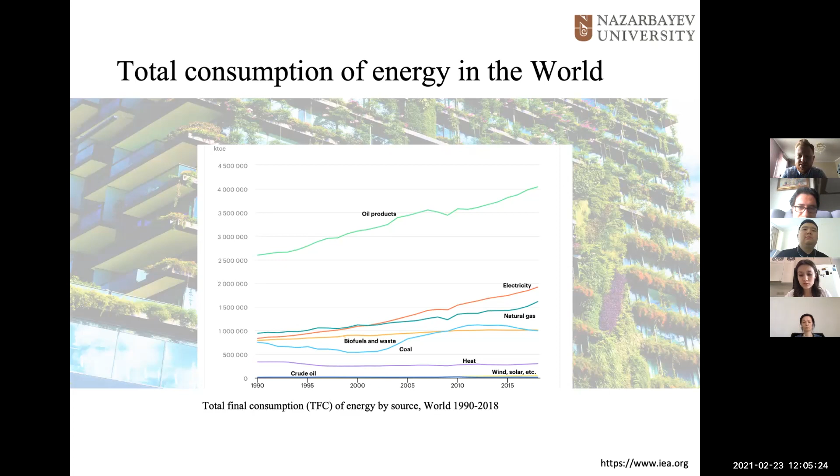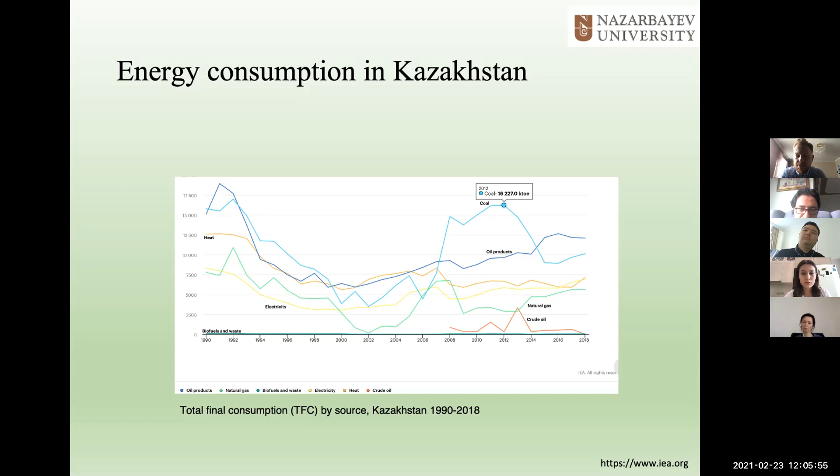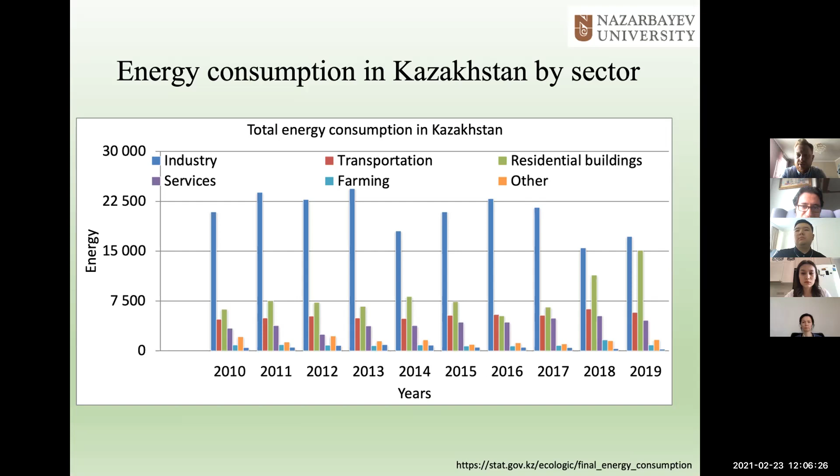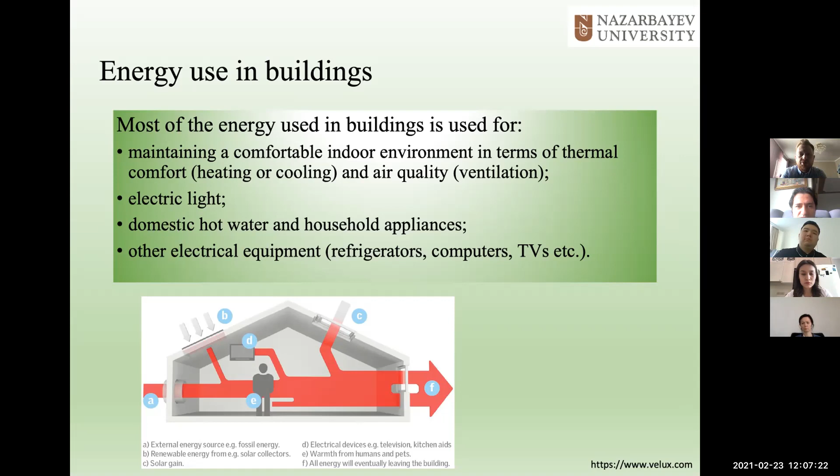So what about the energy used in buildings? Why do we need energy in buildings? We basically use it first for maintaining a comfortable indoor environment. In terms of thermal comfort, we heat our buildings when it's cold and cool them when it's hot. We maintain proper air quality using ventilation systems. Of course, electric lights are important, and on the next slide you will see an interesting fact about electric lights and cooling. And domestic hot water and other electrical equipment like refrigerators, computers, TVs all consume energy. Okay, next.

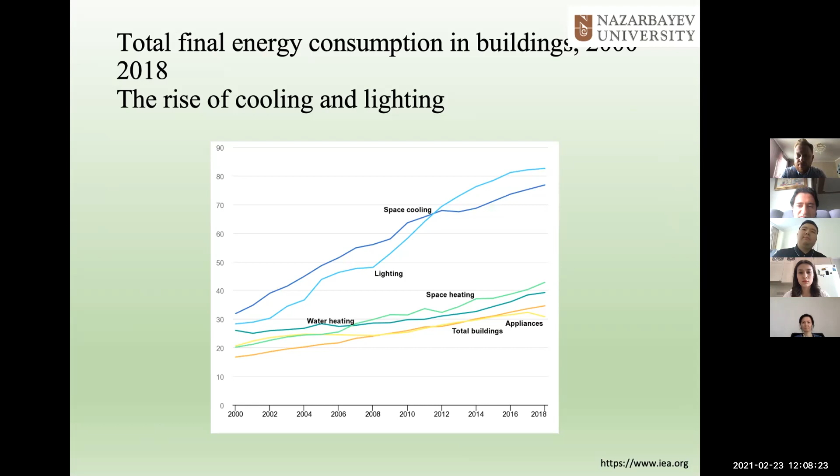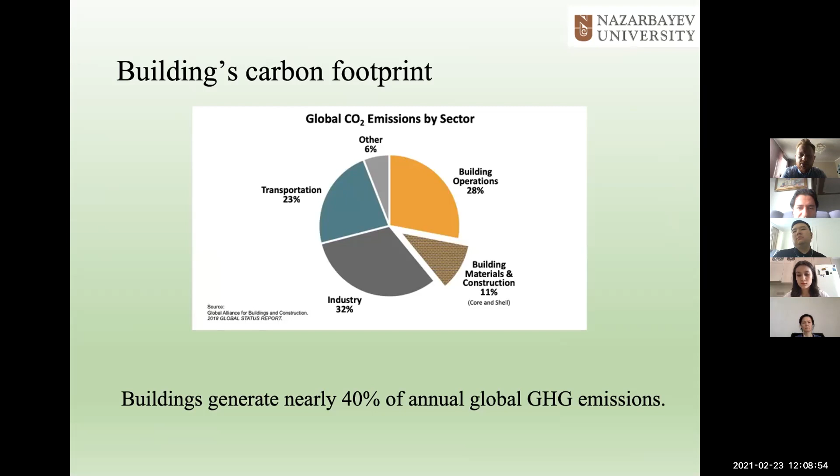A hyped topic now is embodied carbon, and everybody in the green building industry is talking about it. What is embodied carbon? Basically, when we talk about energy consumption in buildings, we only consider the operational type of energy consumption. But now we are trying to see it from another point.

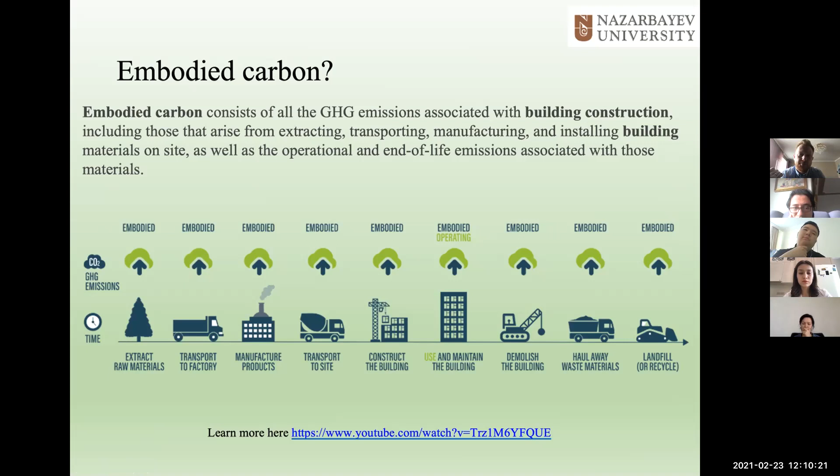Embodied carbon is all the carbon emissions associated with building construction: extracting the raw materials, transporting them to the factory, manufacturing the products, transporting them to the site. This whole sequence of operations is associated with greenhouse gas emissions. In the past few years, people have tried to decrease the amount of carbon at each stage of production, in materials and on the construction site itself. That is a big part now, so we have to consider it regarding carbon footprint reduction. Okay, next.

And here you can see that it's almost 30% of embodied carbon in the total structure of annual global building sector emissions of CO2. Next.

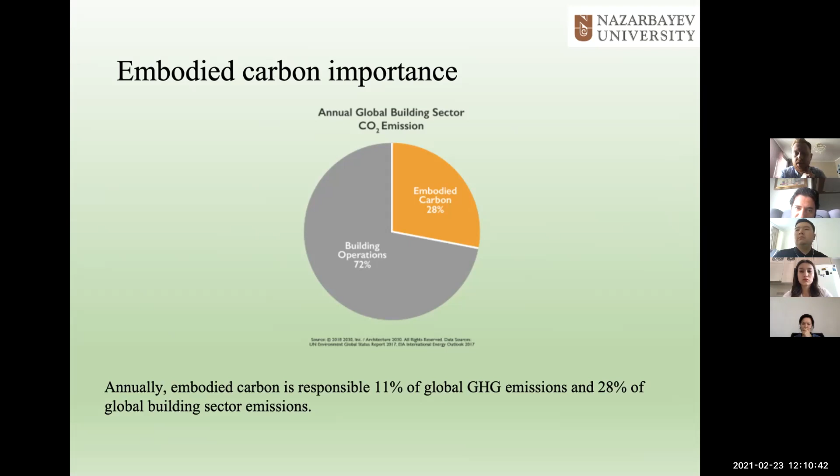And now I would like Zhansaya to help me with the YouTube video. And this is the video about the low carbon buildings and how we can achieve the low carbon goals in terms of buildings and different types of buildings. What should we do? What steps should we take? Please. It's 2.5 minutes, I think. It won't be long.

Zhansaya, there is no sound. No sound, Zhansaya.

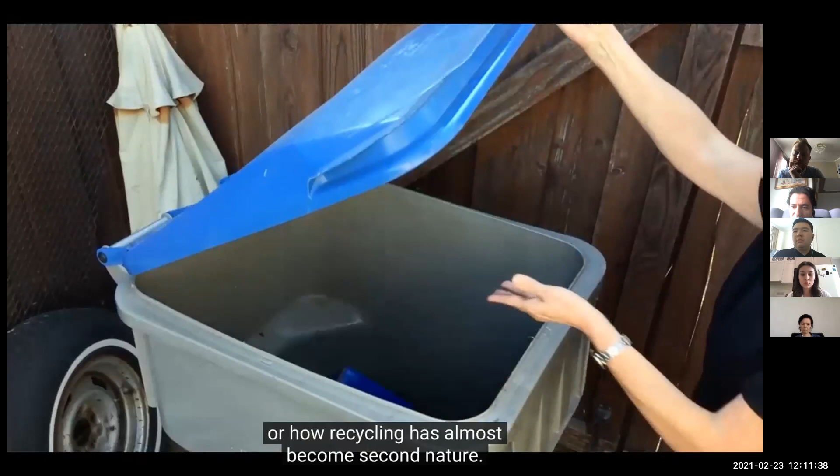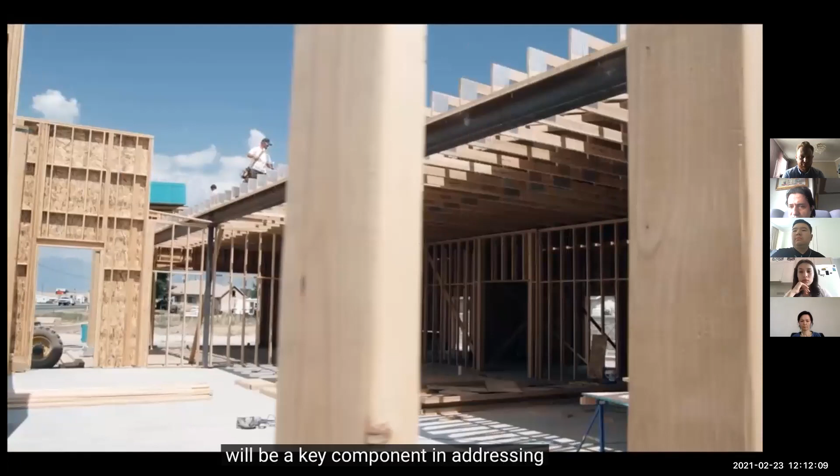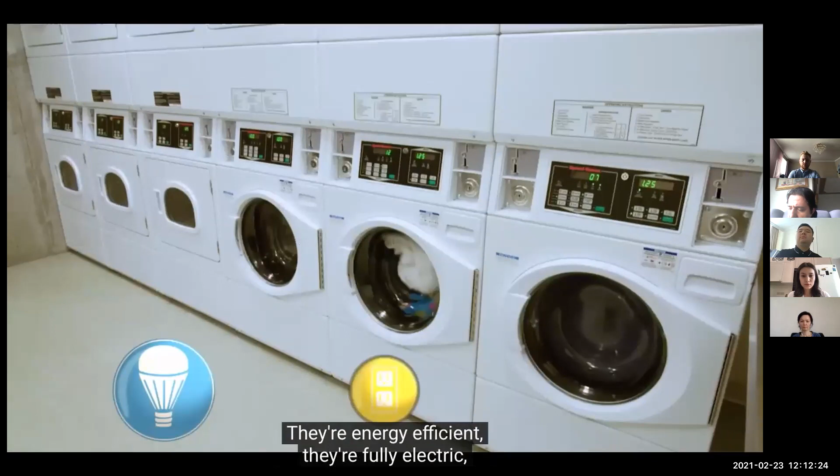Carbon building standards will be a key component in addressing the impacts of climate change. For decades now, there's been an environmental movement raising important questions and inspiring more sustainable solutions. Just compare yesterday's gas guzzlers to today's electric vehicles, or how recycling has almost become second nature. Over the next 10, 20, 30 years, zero net carbon will be a key component in addressing the impacts of climate change we are now facing. You might be wondering, what exactly is a zero net carbon or ZNC building? In a nutshell, ZNC buildings have three characteristics. They are energy efficient, they are fully electric, and they use carbon-free energy sources, such as solar or wind, to meet operational energy needs. This concept applies to all building types: homes, businesses, schools, fire stations, you name it.

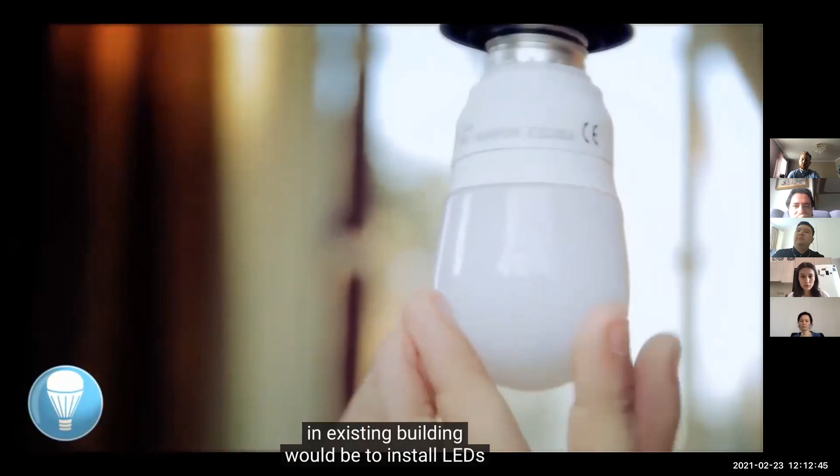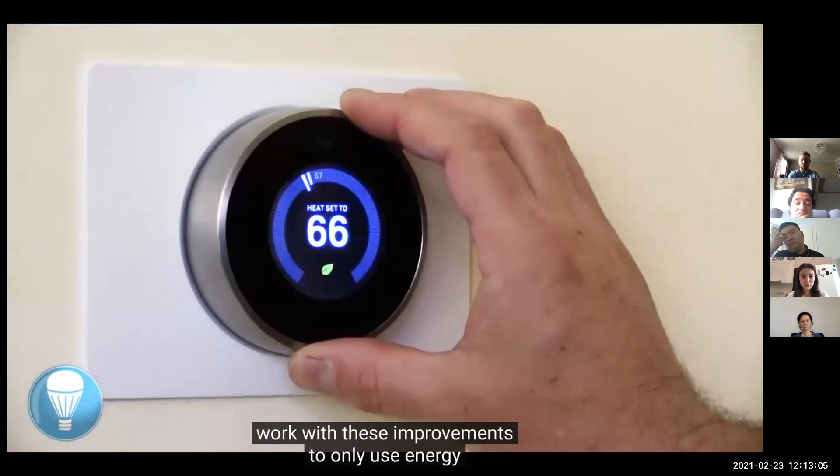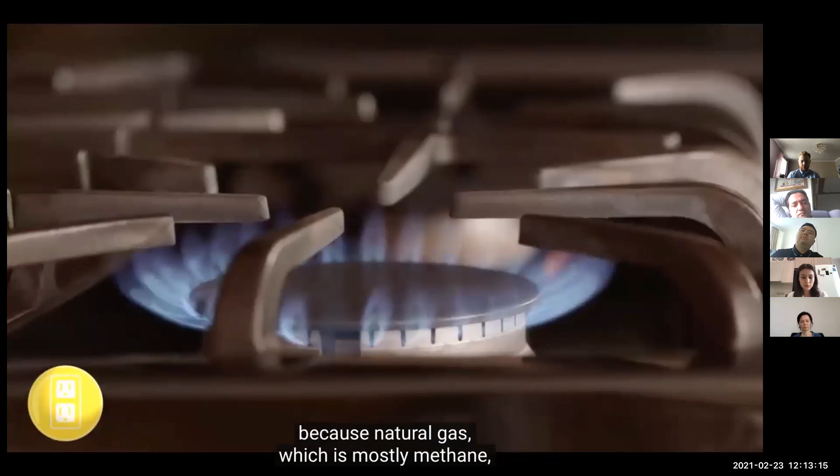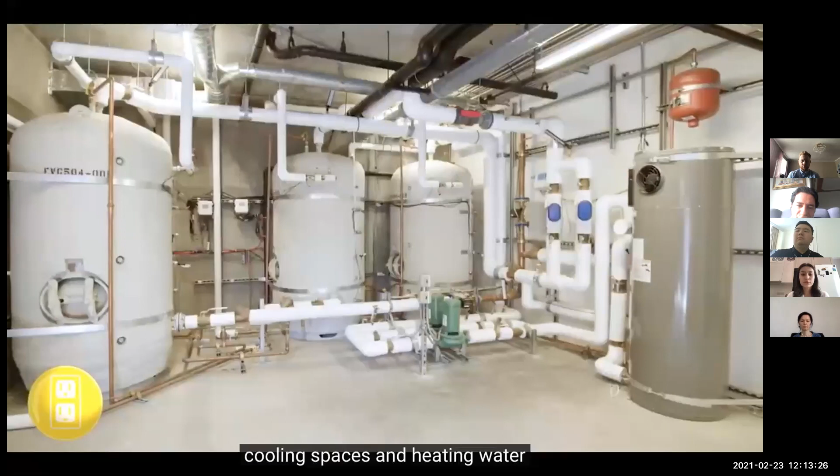A ZNC building starts with energy efficiency. One of the simplest ways to improve efficiency in an existing building would be to install LEDs or use natural light and buy Energy Star labeled equipment and appliances. Did you know natural lighting has been proven to improve learning in classrooms and employee productivity? ZNC buildings feature ideal interior climates and less noise pollution due to energy efficient insulation. New technologies like smart thermostats work with these improvements to only use energy when and where it's needed. ZNC buildings must also be fully electric because natural gas, which is mostly methane, produces greenhouse gases and decreases indoor air quality. Efficient electric options such as induction cooktops and heat pumps for heating spaces, cooling spaces, and heating water are already widely available. The third key part of a ZNC building is ensuring the energy used is carbon-free.

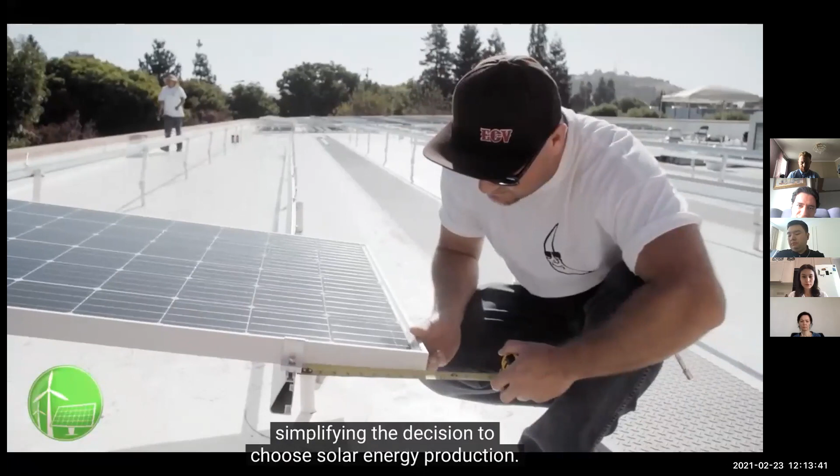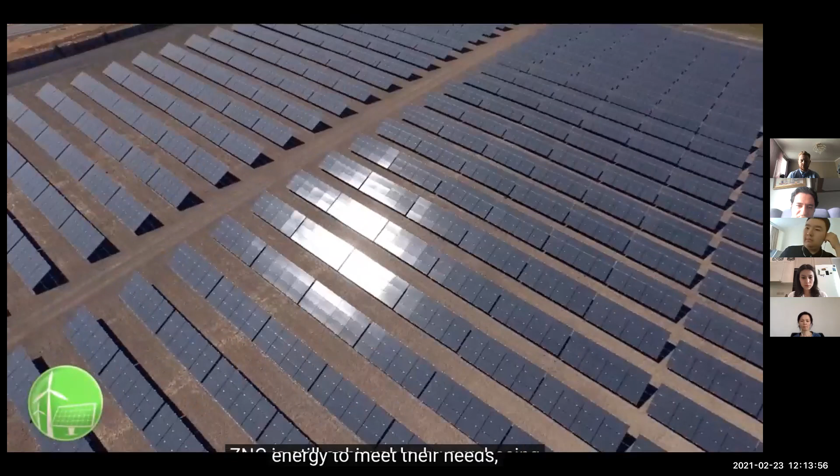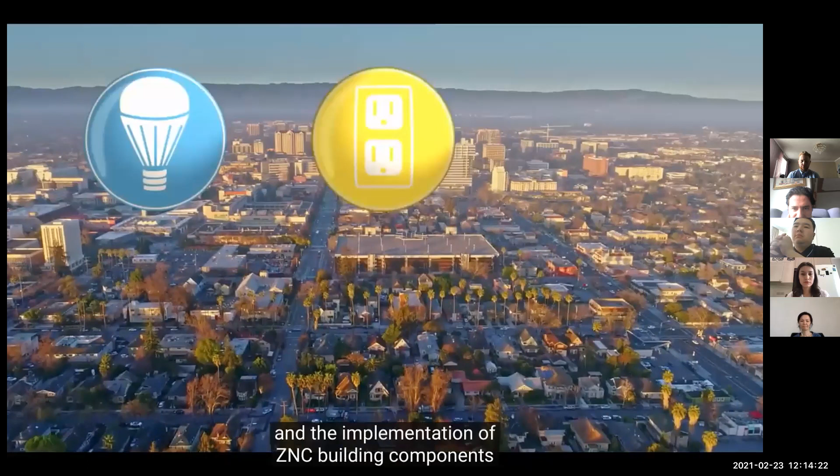Harnessing the power of the sun will go a long way to make that happen. The costs to install solar have declined dramatically, simplifying the decision to choose solar energy production. Even better is when on-site solar generation is paired with battery storage and electric vehicle charging stations to add both convenience and reliability. For buildings that are not well suited for solar or can't generate enough energy to meet their needs, ZNC is still achievable by purchasing 100% carbon-free or renewable electricity from your power provider. The strongest ZNC benefit is the improvement in quality of life for you, your family, and the community, with utility cost savings, cleaner air, and more comfortable living spaces. Moving toward a fossil fuel-free future is a bold but necessary goal, and the implementation of ZNC building components is a huge step in the right direction. To learn more about ZNC and steps you can take now toward this future, check out these resources.

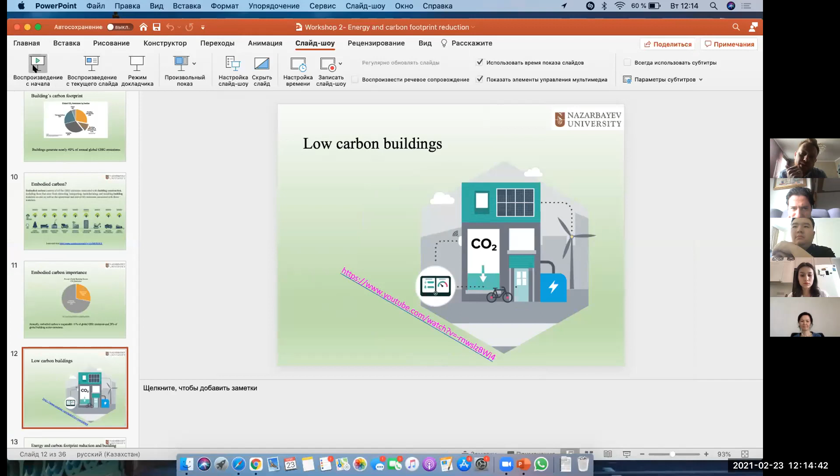Okay, thank you very much, Zhansaya. So the first thing a zero carbon emission building should be is energy efficient, right? The second thing, it should use electricity instead of other sources of energy. And the third part, it should try to use alternative energy sources like solar radiation or wind or something. These are the main three components of low carbon buildings.

And I didn't tell you the main part. Why do we want our buildings to be low carbon and low energy, more energy efficient? Because energy consumption and energy production in the world is growing, and the buildings themselves, the areas of buildings, are growing. The population of the Earth is growing. So we need to find a solution for how to reduce energy consumption.

And the second thing is your savings in terms of money, and this is maybe the most important part, because we don't want to spend a lot of money on heating and cooling our buildings, on electricity or something. And this is, I think, the main point which forced us to find a solution in low carbon technologies, in low carbon buildings. Okay, next slide, Zhansaya.

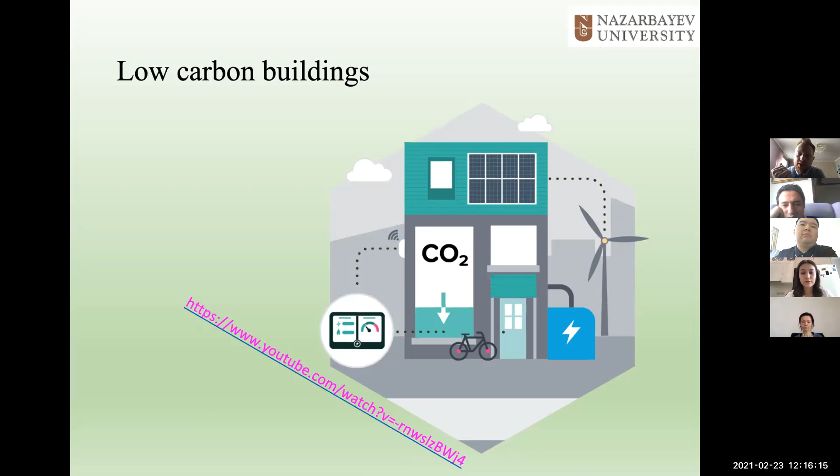So in terms of energy, we should remember that LEED and the other Green Star assessment systems consider energy as the key category in their systems. So for them, energy consumption and energy efficiency is very important, because there are some different types of assessment systems that don't clearly consider energy as the main part, and I will talk about them later. Okay, next, Zhansaya.

So as we know, LEED is a well-known energy assessment system around the world. But it's kind of closed, so you are not allowed to get free access to all the information about the system. But you can use this link that you can see on the slide to go to the overview site with all the descriptions about the system.

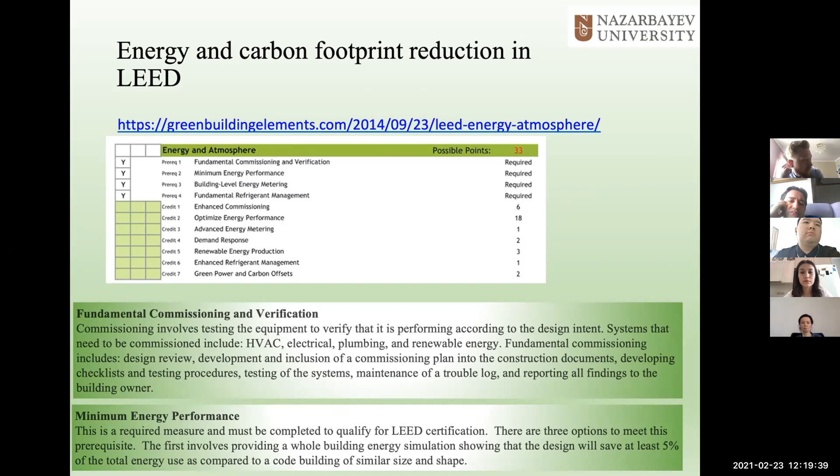Okay, so you can use the link during the discussion on Thursday to get all the information that you need.

Okay, next. Well, I've made a mistake. This should be WELL, but it's okay, I think.

Well, the WELL system is different because it focuses more on the interior parts of the building: how to make it comfortable for living, how to increase comfort, how to increase air quality, how to provide a comfortable environment inside your building for work and living. They don't consider energy the most important part. But in that table, I gathered some information that is more or less connected with energy consumption and carbon footprint reduction.

So you can see there is ventilation effectiveness, enhanced ventilation, operable windows, the thermal performance of the buildings. And this system is very similar to LEED in terms of points and preconditions. You get the point if you meet the system expectations.

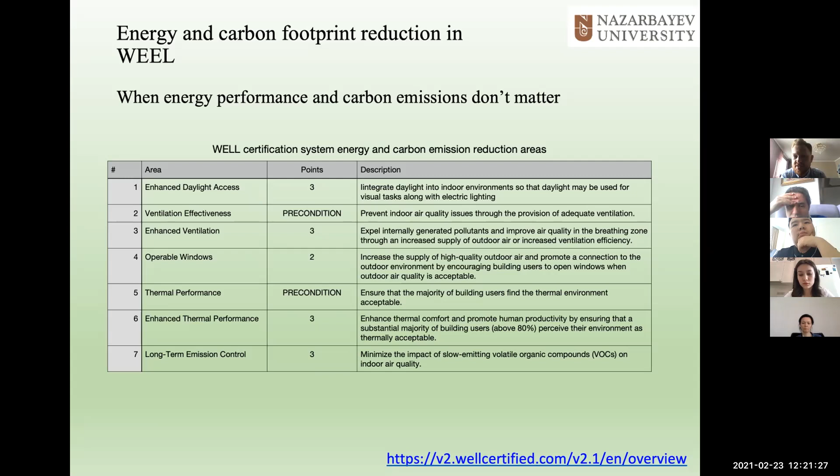Now I'm going to talk about BREEAM certification. BREEAM is an environmental assessment method for existing non-domestic buildings. It's a standard, easy-to-use assessment methodology and an independent certification process. It improves environmental performance and building management, and it identifies parts of a property portfolio that are underperforming and may require refurbishment. It's an ongoing assessment method to encourage continual improvement. You can check this site for more information about BREEAM certification.

Now, the issues covered within BREEAM: energy, water, materials, transport, waste, pollution, health and well-being, management, and land use. Today we will talk more about energy and pollution. The benefits of BREEAM certification are reduced running costs, best practice, a green company image, international recognition, corporate social responsibility, higher rent or property marketability, benchmarks for improvement, and reduced environmental impact.

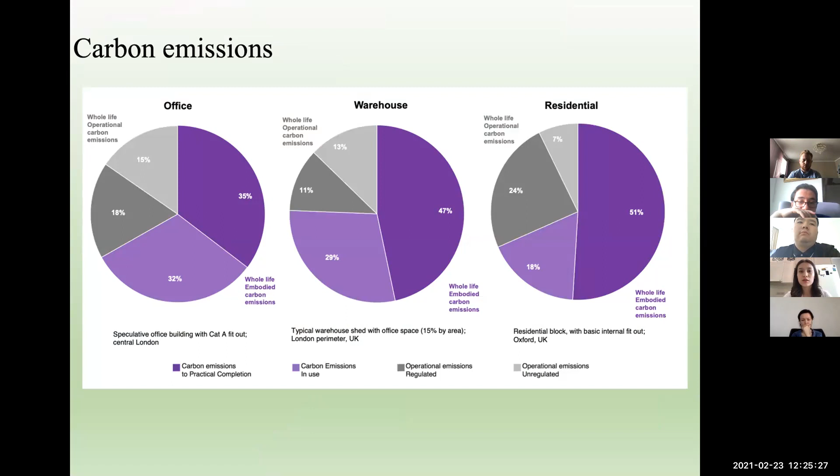Here are the carbon emissions. The whole life figures illustrated have been calculated in line with the modular structure of EN 15978 and account for all components making up carbon emissions calculated over a 60-year life cycle. The decarbonization scenario used Slow Progression from the National Grid Future Energy Scenarios.

BREEAM assessed buildings achieve an average 22% reduction in CO2 emissions compared to buildings designed to regulatory minimum performance requirements. BREEAM Excellent buildings save more than 30%, and Outstanding rated buildings in excess of 50%. This huge reduction in CO2 emissions by BREEAM assessed buildings will ensure that 2016 sees a rise in the number of companies applying for assessment.

Here are the minimum BREEAM standards by rating level, and you can see the reduction of CO2 emissions: Excellent level is 6 credits, and Outstanding rating level is 10 credits. And here are the standards for low or zero carbon technologies: at Excellent rating level it is 1 credit, and Outstanding the same. There's more information in this link.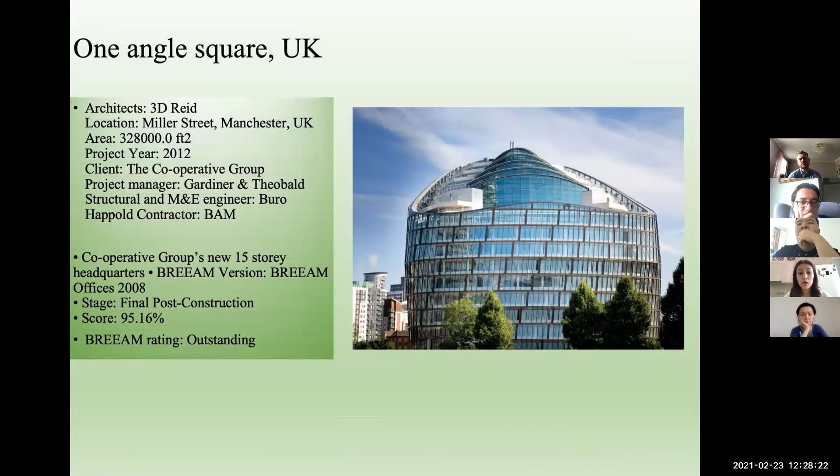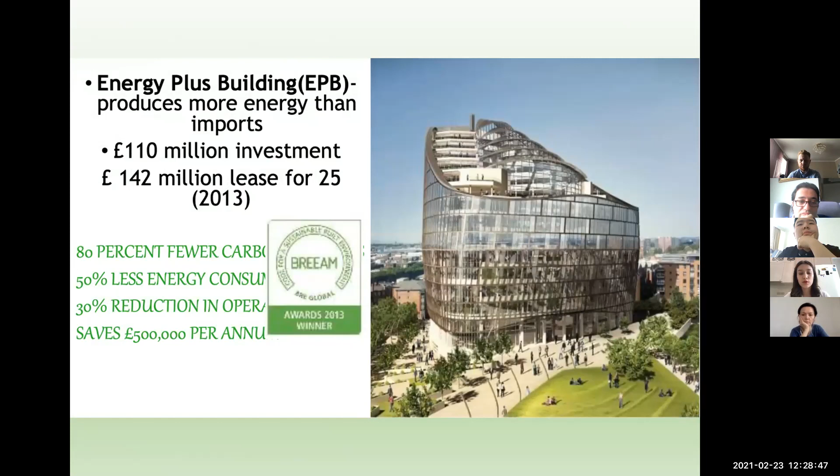Now I'm going to talk about One Angel Square in the United Kingdom. It is located in Manchester, and the BREEAM rating of this building is Outstanding. The results of BREEAM certification: it's an energy plus building that produces more energy than it imports, with 80% fewer carbon emissions, 50% less energy consumption, and it saves 500,000 sterling per annum. And now my colleague Danyar will talk about Green Globes certification.

Thank you. Can you hear me? Yes, we can.

Okay, thank you, Zhansoya. So Green Globes is an online green building rating and certification tool used primarily in Canada and the USA. In Canada, the following Green Globes modules are available: Green Globes for New Construction and Green Globes for Sustainable Interiors. There is also Green Globes for Existing Buildings, used in the USA. These modules can be used for a wide range of commercial, institutional, and multi-residential building types, including offices, schools, hospitals, hotels, academic and industrial facilities, warehouses, laboratories, sports facilities, and multi-residential buildings. Next slide, please.

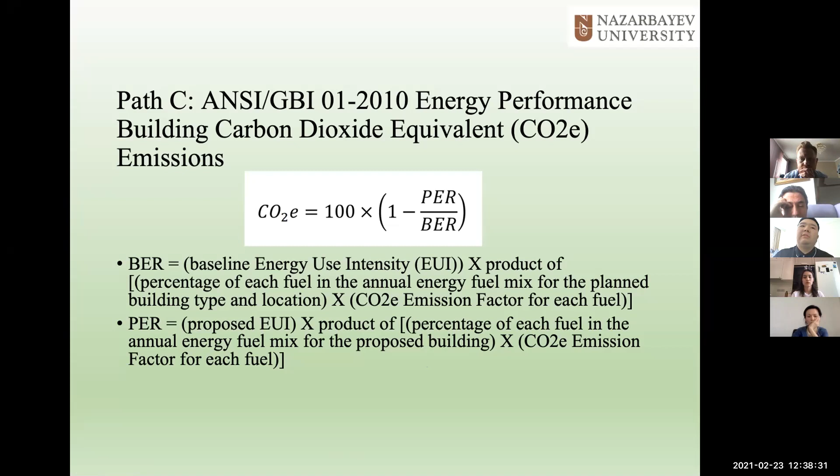Okay, so I'm talking about Path C because it is the one that is made in collaboration of GBI, which is Green Building Initiative, and ANSI. So this is the formula that they use for calculating the reduction of carbon emissions. PER is the proposed equivalent emission rate, and BER is the baseline equivalent emission rate. I'm not going to go in detail with the formula. You can see it yourself. So basically, the more reduction you make, the more points you will be awarded in this system. Okay. Can you? Yeah. Thank you.

Okay, thank you very much. It seems that you finished delivering the content. Yeah, we have a quiz, by the way. Yeah, we have some. What's the plan? We have a quiz, a game. Okay. If you have questions, we can. Okay. It is a question and answer session. Then there will be some other activities. Yes. Guys, please ask. May I ask a question? Yes, of course. Go ahead.

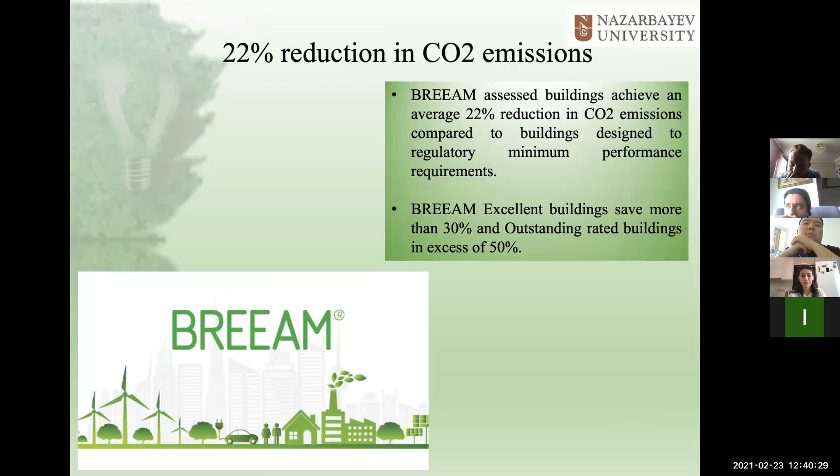Could you open your slide, the beginning? Yeah, this slide about 22% of saving energy. You said that it assessed, like the first sentence, minimum performance requirements. Which are you talking about? UK's or Kazakhstan's, or what kind of standards? UK standard, because, okay, I think in the UK, 80% use BREEAM certification. Okay, thanks. Thank you for your question.

Can I ask a question? Of course, yes you can. Go. Danyar said that in path D, we get 25 extra points. Could you please tell for what? I just skipped that.

So basically what I said is there is some specific threshold. When you pass it, for example you manage to get 20% carbon dioxide reduction, you get already 100 points. After those 20%, if you get 30% or more, you will get bonus points for that. So that's how you get the bonus points.

Okay Danyar, why are they giving bonuses? Because this is my understanding that path A and B are just only for energy, but path C is also focusing on emissions as a plus over energy. That's why maybe they are awarding 50% bonus points extra. And it's the same for path D, they are also awarding 25 bonus extra for emissions. This is my understanding, I don't know.

What do you think, why are they giving bonuses for path C and D? So I'm not gonna lie, I didn't go super in detail with Energy Star and ASHRAE, which is path A and B, but to my assumption, you get maximum points in that area after having a specific amount of carbon footprint reduction. In the other paths C and D, as I mentioned, you get extra points when you get more reduction than the minimum requirement. I think it's because of this.